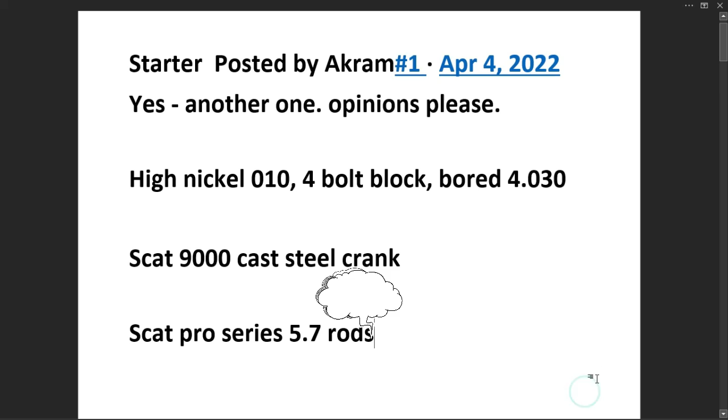The dyno tests I did for Sealed Power definitely showed that the D-shaped dish pistons work well, so score 9 out of 10 on that. Having the pistons 5 thousandths in the hole is not the best plan. It would be much better to have them 5 thousandths out.

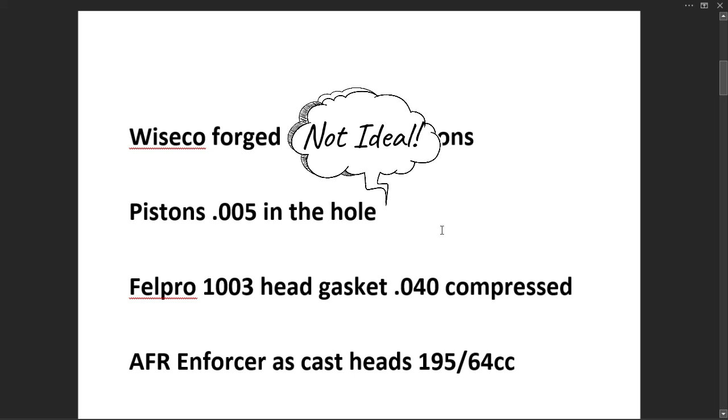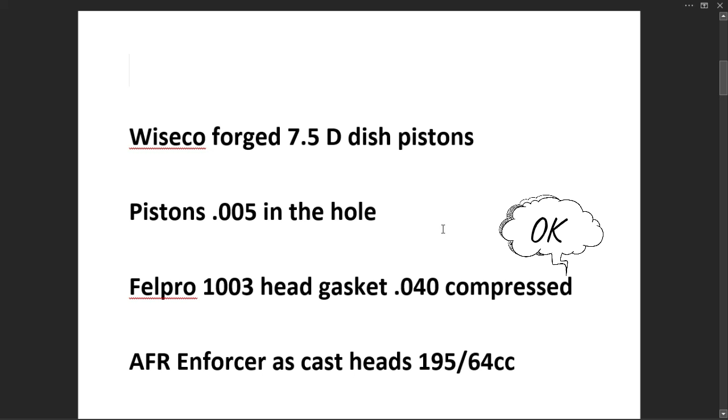Ideally, you need the quench to be about 28 to 30 thousandths total clearance. That clearance assumes we are going to use that 40 thousandths thick head gasket. As for the Enforcer heads from AFR, these are ideal if you're having to buy within a budget.

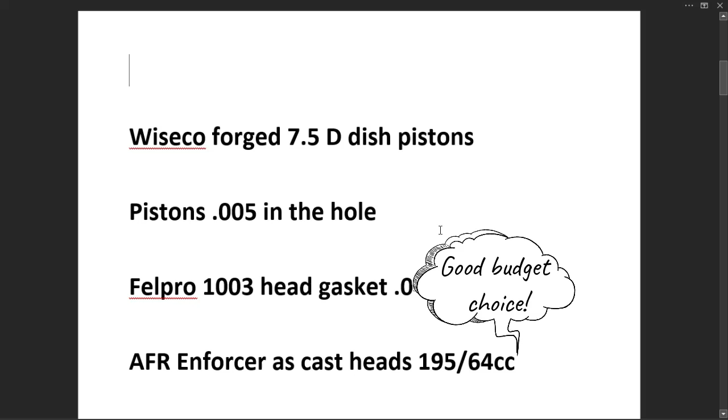So far, this engine spec is looking kind of okay, but here is where we come to a major snafu. As far as the profile goes, this cam looks okay. However, the lift is a bit shy of what's needed—the 1.6 or 1.65 rockers would fix that.

Where this cam fails abysmally is on the lobe separation angle chosen. If that was the cam chosen by Howards, then shame on the guy that picked it. It is so far off what's needed, it's unbelievable—it should be 107. The power this engine is giving away means this 383 might make what a decent 350 does in terms of torque.

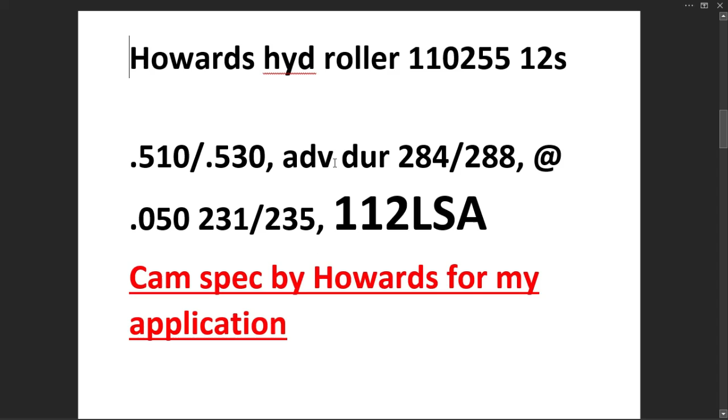As far as rockers are concerned, they need to be ideally 1.65 on the intake and 1.6 on the exhaust. As for the exhaust, we're on a crossover point.

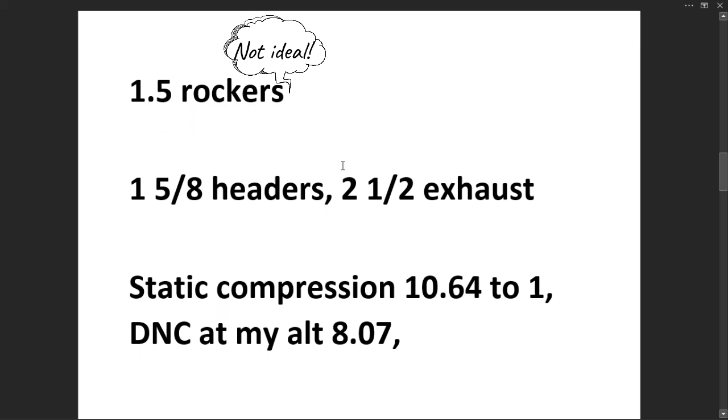1 5/8 diameter headers are good to about 525 to 550 horsepower on a small block Chevy. This engine should make around 540 to 550 horsepower, so there's this situation where 1 3/4 headers might just come into play.

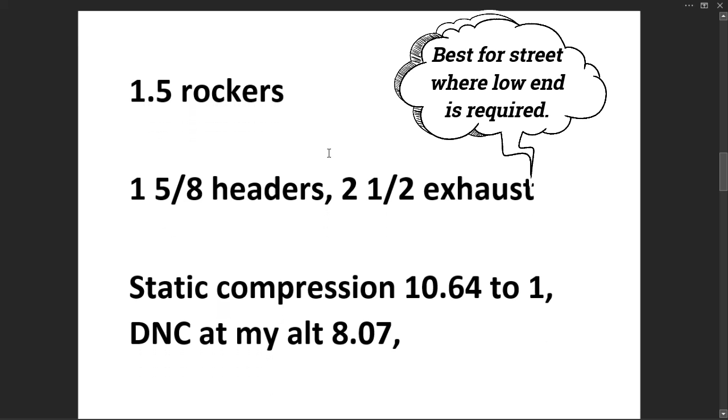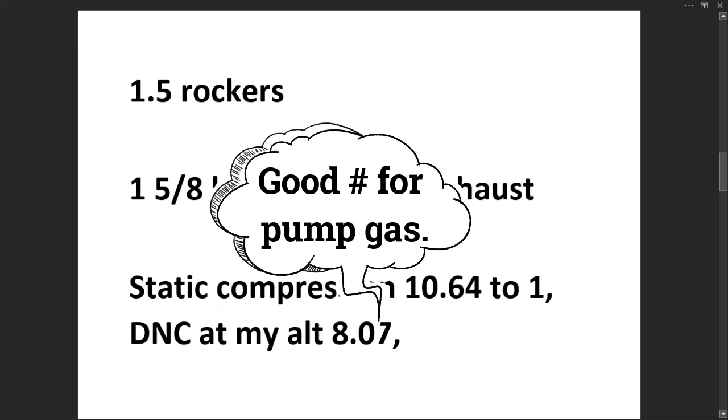As for the dynamic compression, that's fine for what you currently have—8 to 1 is a good number to go for with a street motor on pump gas. However, the cam I'm suggesting here will marginally raise that, but you should still be okay.

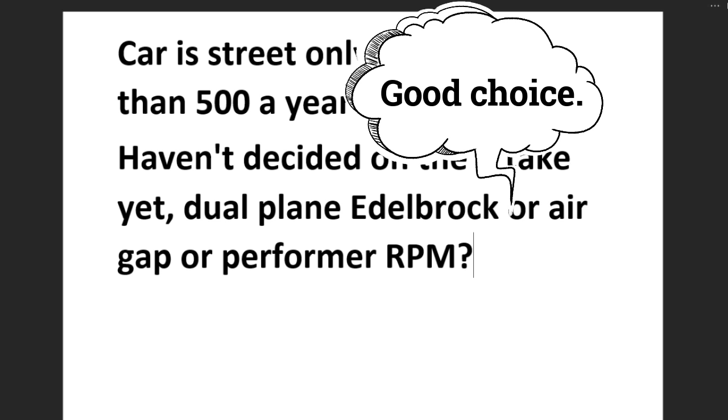As for the intake, an Edelbrock Air Gap Performer RPM manifold will work fine so long as there's adequate carburetion and a stepped dogleg style booster is used. This atomizes the fuel much better than the straight leg booster, which is inadequate for the job on a non-heated intake. For good results, carburetion can be quite finicky.

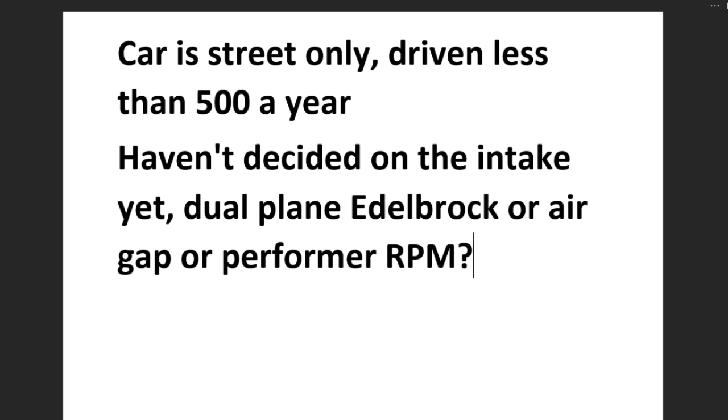Don't use a 650, it's too small. The 750 might be just about the bottom limit of what you should use, but a double pumper is not the way to go—a good vacuum secondary carb is going to be it.

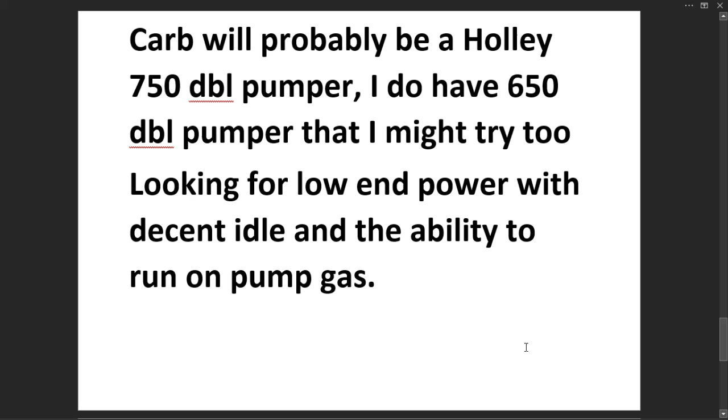Both Holley and Quick Fuel have very good vacuum secondary carburetors. For a two-plane intake without a spacer, you're going to be looking at 800 to 850 CFM to give the best area under the curve.

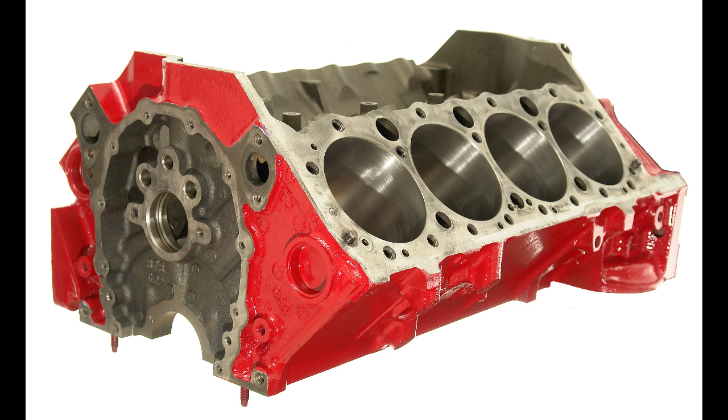The first thing I need to let you know is that this was essentially a dyno mule, and it went through several different iterations during the 3 years or so that it was just used on the dyno. This means you will see it in several different guises.

Now for some block details. First, all the machining was done at Terry Walters Engines in Roanoke, and a very nice job they make. Terry's an ex-Pro Stock guy, he does Pro Stock work on pretty much everything. Not necessarily the cheapest in the world, but definitely very good quality for what you pay.

Now, a warning on blocks. Don't use the later roller cam blocks. It is possible to very easily overpower them. I've used 3 of these 880 blocks, and I've broken every one. One of them at only about 520 horsepower. Well, 520 horsepower is kid stuff, right? So don't use one of those blocks over about 500 horsepower. Get the earlier block, and a 4-bolt block's best, but you can put on splay caps, and that's your best option.

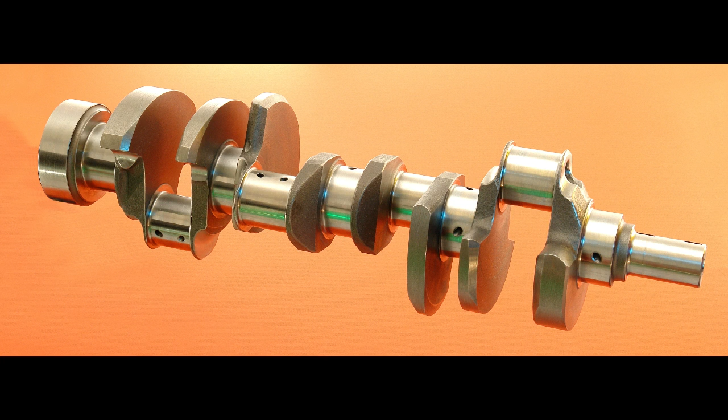What you're looking at here is what could possibly be described as the heart of our 383, our beastly 383. This is the basic Scat 9000 crank, and I can tell you from experience that we found it to be okay on a non-detonating, properly set up motor up to 660 horsepower. We've never broken one, and at the time of doing this video, I believe there's 3 versions, but the COVID-19 slowdown may have changed that. This one's the basic one here.

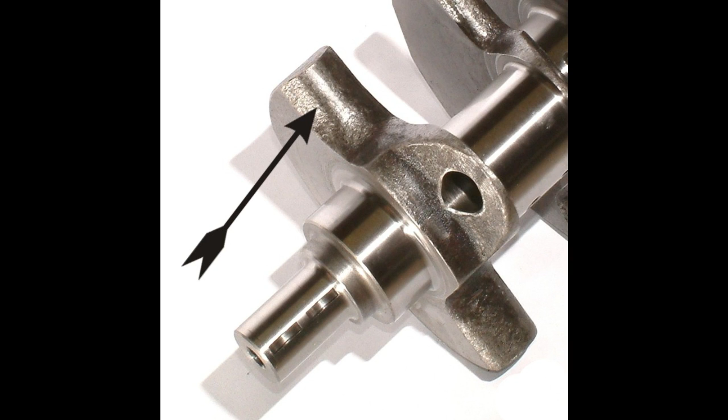The crank we normally use is shown in this video here with the rounded edges. It's a few bucks more, but I'm the one that did the original proof of concept test for Scat on this. That rounded crank is worth about 7 to 9 horsepower over the flat face crank that I've just shown you.

As for rods, we rarely use anything other than these Scat stroker rods. They're very cost effective. They will go to 8,000 RPM and 700 horsepower with absolutely no problem.

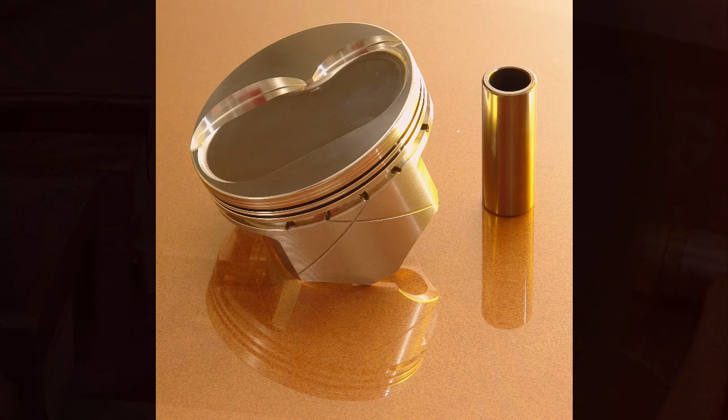There's some good piston choices available. I'm showing this DSS piston here because it has a novel feature. Note the X in the thrust face of the piston. That's there to do 2 things. First, it moderates the oil on the bore - if there's too much, it takes it away, if there's not enough, it puts it there. Secondly, it enhances the break-in procedure by making sure that any fine grit or iron particles from the break-in get passed down those grooves instead of getting trapped between the skirt and the bore and scoring the bore. It's very effective at that.

The last point to note here is the dish in the piston. We've tested pistons from Mahle, Sealed Power, Icon, and a few others, and that dish piston setup always seems to work very well in a motor between 9 and 10 to 1 compression.

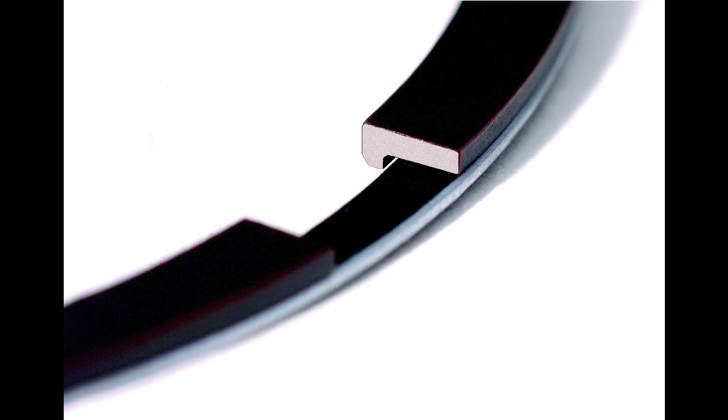When it comes to piston rings, I very much favor Total Seal. And this is what I use unless I'm using a Mahle piston, which of course comes with a pretty good ring pack.

Here's one of our high compression short blocks. Just so you're sure, here's where the piston should be at TDC.

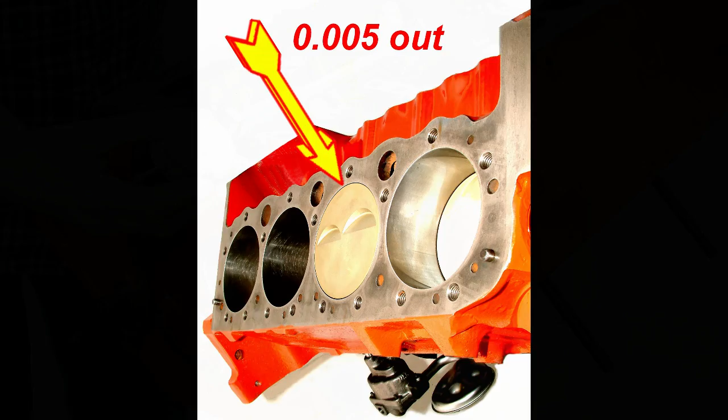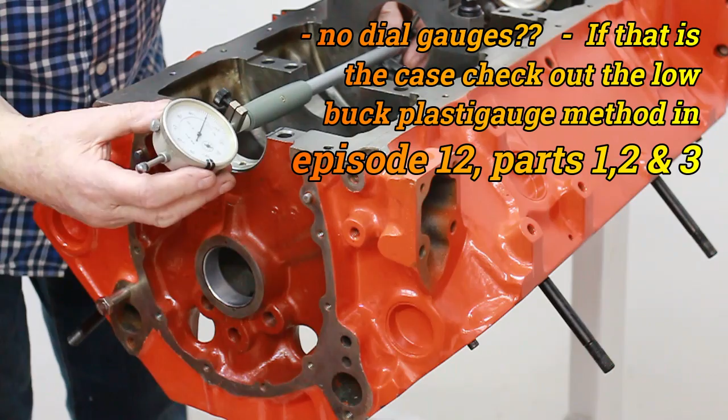Bearings, well, we use mostly Clevite. The key to success here is getting the clearances right as it's shown in the text in the picture. If you don't have fancy equipment, check out the title shown on screen. Do it right and it should all spin something like this. If it doesn't, refer to episode 12, parts 1, 2 and 3.

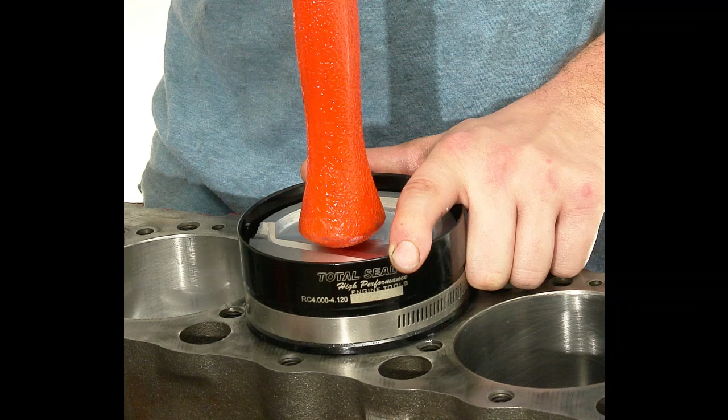When it comes to piston installation, don't use one of those sheet metal ring compressors. Use a full circle deal like this Total Seal one here. It will save you broken rings, especially if you're using skinny rings.

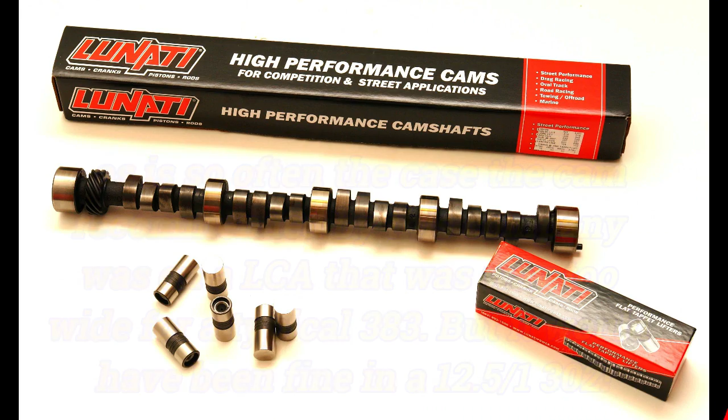We are now entering the blunder zone, namely cam selection. Because of time constraints, I'm going to have to be a little more focused on what we did with our street and race 383s here.

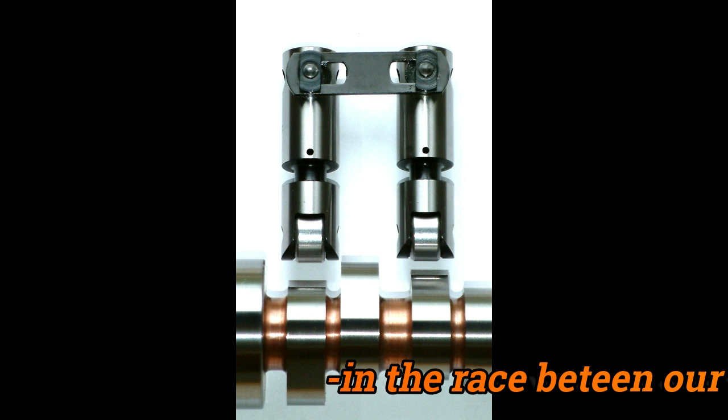Let's talk lobe centerline angles, as this is the most important factor to get right. For engines with intake valves 2.02 to about 2.08 and compressions from about 9.5 to 10.5, you are going to want about 106 for a roller cam and 107 for a flat tappet cam.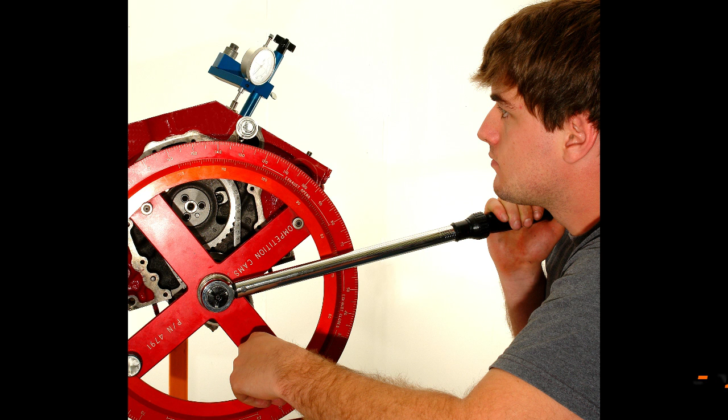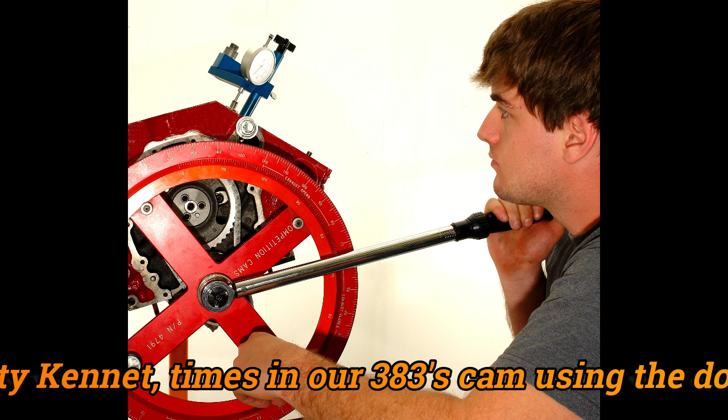If you're going up to 12.5 to 1 compression like we did for our race engine shown in part 1, then with that compression ratio, the lobe centerline angles will go to 108 for a roller cam, 109 for a flat tappet cam.

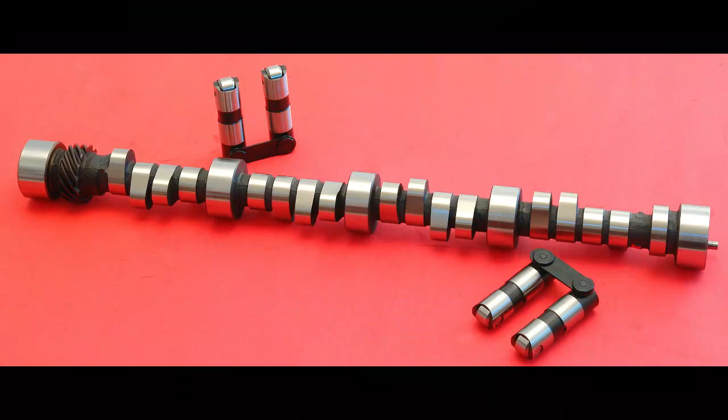As far as cam advance goes, this depends on the size of the intake valve used. For a regular 202 valve, the ubiquitous 4 degrees works pretty well across the board. For a bigger valve, say a 208, that timing may need to drop back to about 2.5 to 3 degrees of advance.

We've had some good experience with roller hydraulics in our 12.5 to 1 383. This Comp Cams grind, done for us to my specs, cranked out 621 horsepower on the dyno. The lobe centerline was 108 and the duration was about 300 at 6 thousandths on the intake and about 304 on the exhaust.

A word about lifters. With this advice, you'll avoid the possibility of losing up to 100 horsepower on lifter selection. Use only a limited travel lifter. Yes, they're more money, but they're essential for what we're doing here.

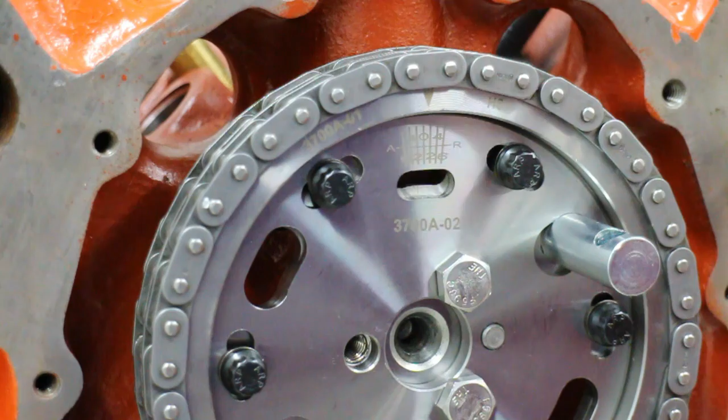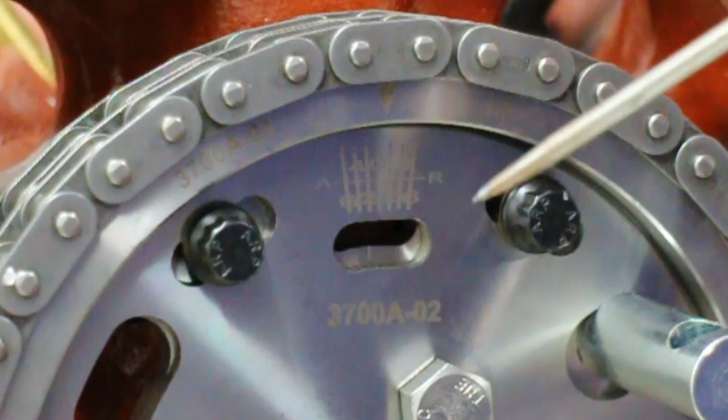For anything less than an all-out build, I use these adjustable timing chain setups from Comp. They've got about plus or minus 6 degrees of advance and retard. They're easy to adjust, and it allows us to get the timing absolutely spot on when we're on the dyno and dialing everything in.

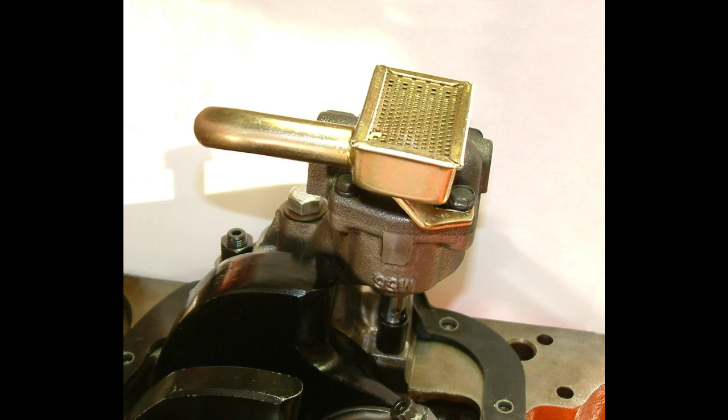Before we button up the bottom end, it's time to look at the lube system. At this point, most builders glibly install a high pressure, high volume pump. In most cases, I refrain from doing this.

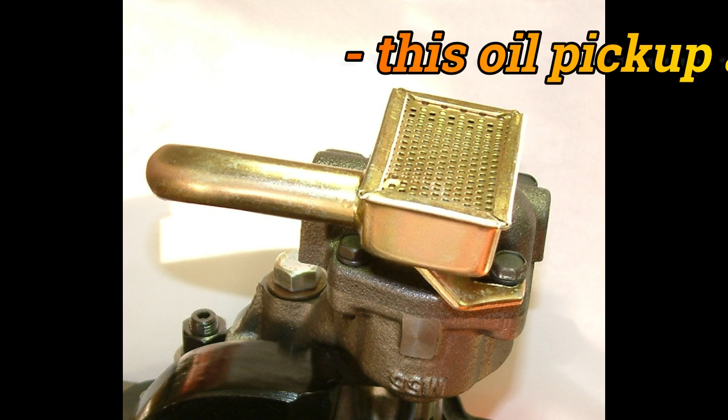Usually some porting work on the pump entry and exit points gets the job done. After this, I normally get about 5 to 10 psi more without draining the engine any extra power to drive the pump. The pickup I'm showing here is an entry-level Moroso item.

Well, that's the bottom end catered for. Now if you want to do a check to see how well you've built it, this whole assembly here, with the cam installed but no heads or anything like that, the pump and everything, should not take more than about 20 foot-pounds to turn it over. Normally when I'm doing this, the turning torque is around about 16 pounds-feet. So you've got a goal to shoot for there.

Now it's time to move on to the cylinder heads and induction system. First, the heads. These were some Dart heads that I ported myself. They were the Platinum Pros. They started off at about 180 cc's, and by the time I'd finished porting them, they were about 195. You might want to check out some of my porting videos and you'll get the idea.

The porting in this shop is not the same as your everyday porting you see on videos normally. But I'll leave you to check that out.

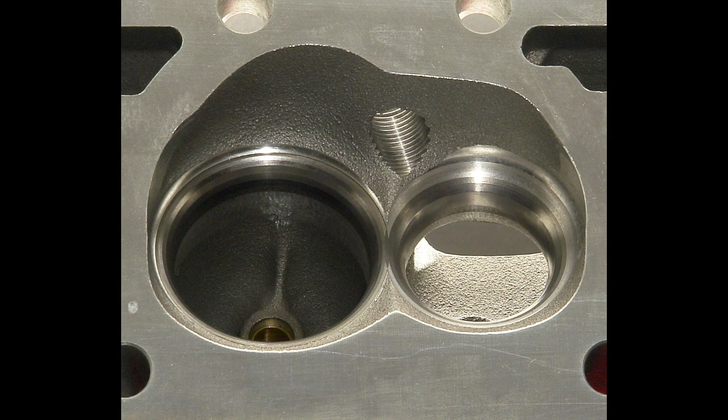Here is the chamber of the Dart Platinum Pro 1 head that Tony at Dart did so much wet flow testing on to optimize as far as possible how the mixture entered the cylinders. He did a great job because in spite of flowing no more air than before, this cylinder head produced some excellent results on the dyno.

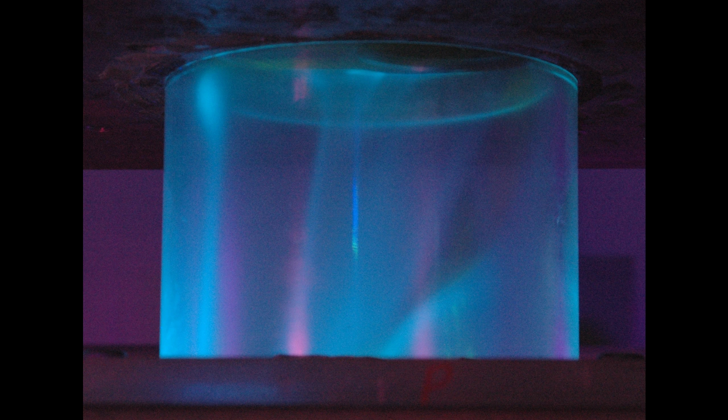I did some testing for the late Dick Maskin, who was the boss at Dart, with both types of cylinder heads, the previous one and the wet flow one, with a 274 Jones hydraulic roller cam. The results were as you see here.

Note that there was a big increase in torque and horsepower for only attention to the mixture. Now this was only about a 9.2 to 1 motor, and notice that it made 500 foot-pounds and 500 horsepower on 87 octane fuel, and it idled like a watch.

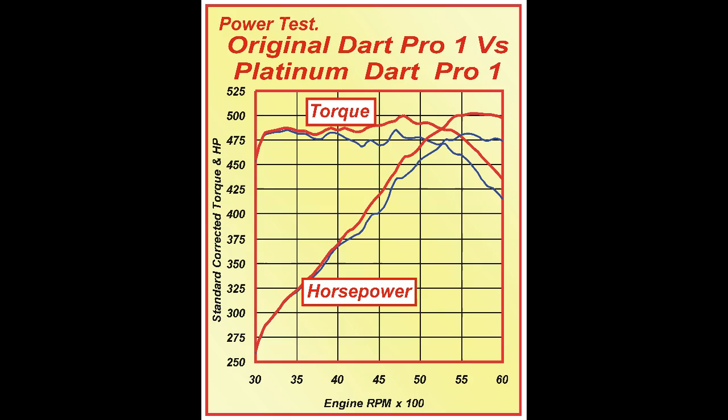A build like this may suit a lot more of you because no expensive porting is involved. Here's the heads I ported back then. These Dart Platinum heads were equipped with a 205-16 valve combination, and they flowed 300 CFM at 650 thousandths lift with a big fat flow curve all the way up to 650.

A later version of these heads made more horsepower than this, but of course I've had the best part of 8 years to refine the design.

As for intake manifolds, the rules for the race motor, the one you see running in part 1, called for a two-plane manifold, a stock two-plane manifold, plus a restrictor plate. So that did limit our power.

For the non-restrictive setup, we used two manifolds which gave about the same power. One was from Professional Products and the other was a good old Super Victor from Edelbrock. Both of those intake manifolds went way past 600 horsepower - 621 comes to mind.

With the two-plane manifold on and the restrictor and all that, the race motor made about 545 horsepower. Again, this was good solid horsepower. As you can see from the video, we ran up against cars with 40 cubic inches more, and yes, we lost, but just by a smidgen. Had we had that extra 40 cubic inches, they would have lost by at least a couple of tenths.

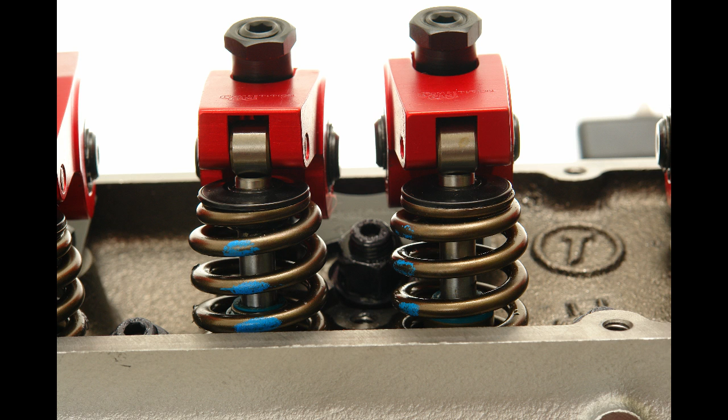But that's all speculation. The Dart heads were equipped with Comp's Beehive spring, part number 26918, an exceptionally good spring. The rockers seen with the springs were 1.65 on the intake and 1.6 on the exhaust, but we swapped these fairly early on for some Crane rockers, 1.65 and 1.6, because they had a faster off-the-seat action, which is just what you need for a stroker motor.

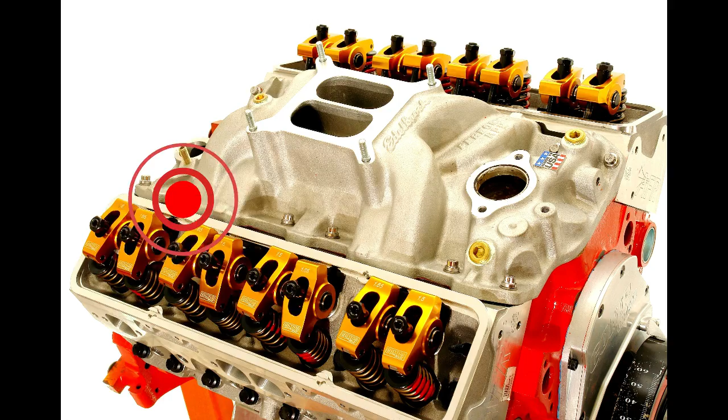The carburetor you choose can make or break your 383 build. Firstly, let me say that Holley carburetors have come a long way since I first started using them.

They were rather crude devices in 1970, but as somebody who was employed to redesign Weber carburetors - that's me - at one stage for a factory team, I can tell you that the technology that's gone into the current Holley makes it one of the finest fixed jet carburetors on the face of the planet. You've just got to know how to use it. And they manufacture such a range of carburetors that it's up to you to choose the right one.

Now, a couple of points here. If you are using an unheated manifold, as we were with our Edelbrock air gap, you must make sure that the fuel is atomized well, especially at part throttle. Otherwise your mileage will be up the Swanee, you'll coke up cylinders, etc.

So with an unheated manifold, a downleg booster is a minimum requirement. Do not use a straight leg one. And a downleg stepped booster is better yet.

If you're going to use a spacer on your two-plane manifold, it's not really the way I like to go, but it can be beneficial in some ways. Remember, if you put a spacer on, what you're doing is turning your two-plane manifold into a crude single plane. Then with that spacer, you're going to need about a 770 Holley carburetor, or a Quick Fuel. They both make good 750 to 770 vacuum secondaries.

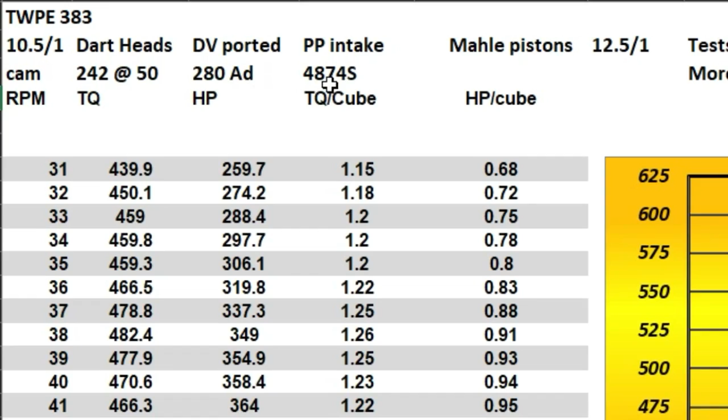I want you to follow the cursor here, that little cross up in the corner. That 10.5 to 1 is wrong, I must not have filled that out properly - it's actually 12.5. You can see we used the Mahle pistons in there, and the cam was a Comp Cams grind on the extreme energy street rollers. So it was not super aggressive, but was good enough to get the job done of making the power called for.

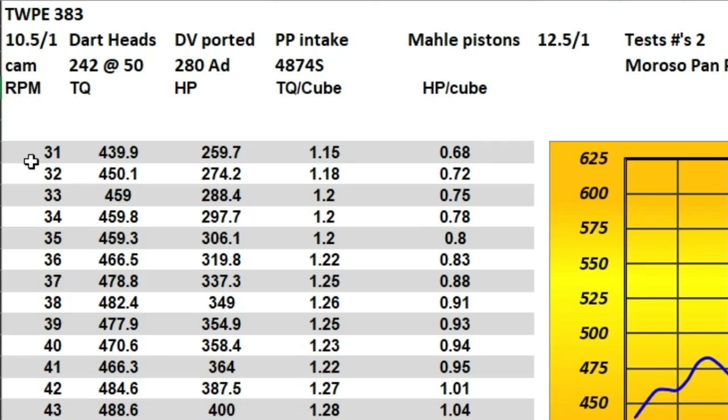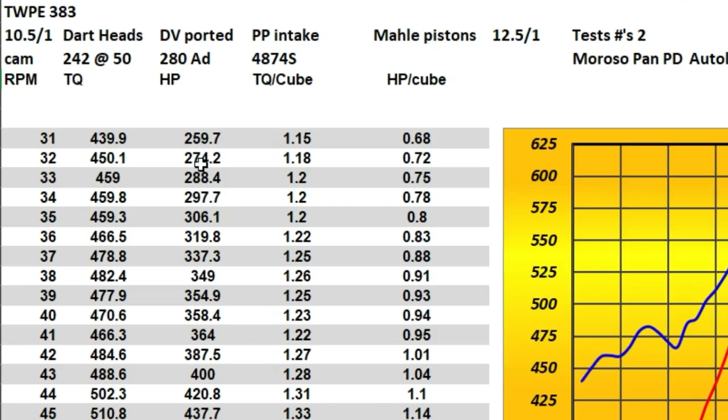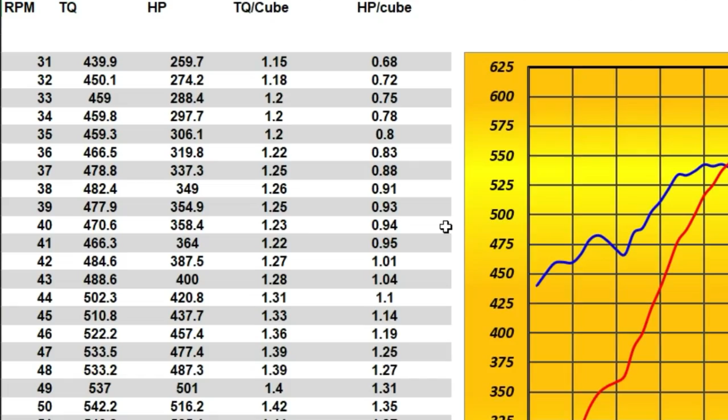The profile number is the 4874S - that's S for solid, that's my designation there. Now I want you to notice the torque per cube deal and see how that goes down. Our peak torque was showing well there - we were at 1.42 foot-pounds per cube at peak torque of 5,200 RPM. Peak power did not quite get to 621, it was 620.9, which was pretty good.

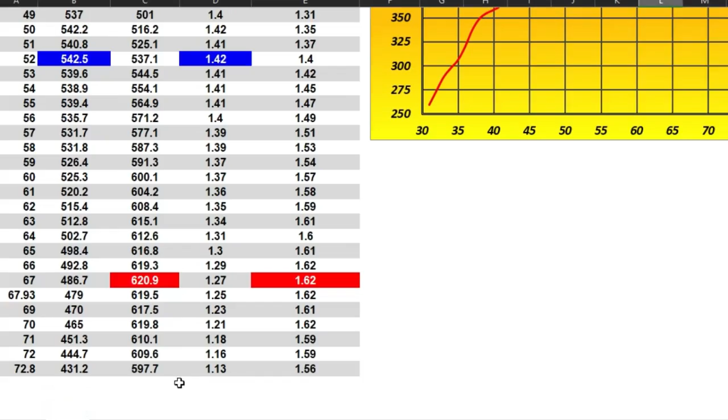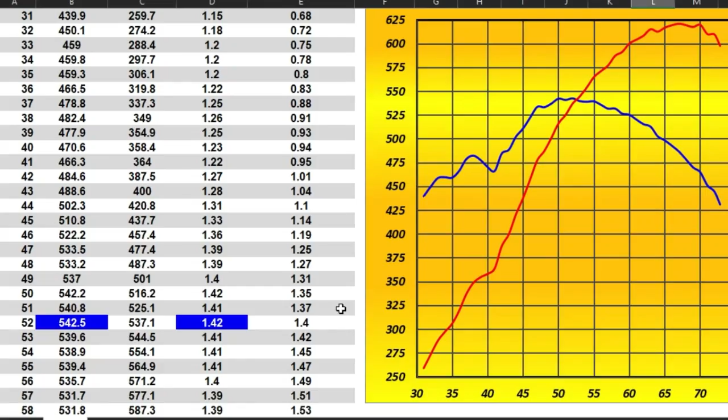Our best power per cube was 1.62 horsepower per cubic inch, which for a regular motor that can be driven on the street is pretty damn good. The power curve creeping in on the right has the torque and horsepower on the vertical scale and the RPM times 100 on the horizontal scale.

Well, this brings us to the end of my two videos here. Now this has been something of an experiment, and I'd like your comments on how I might improve it, or whether I should give it up or not.